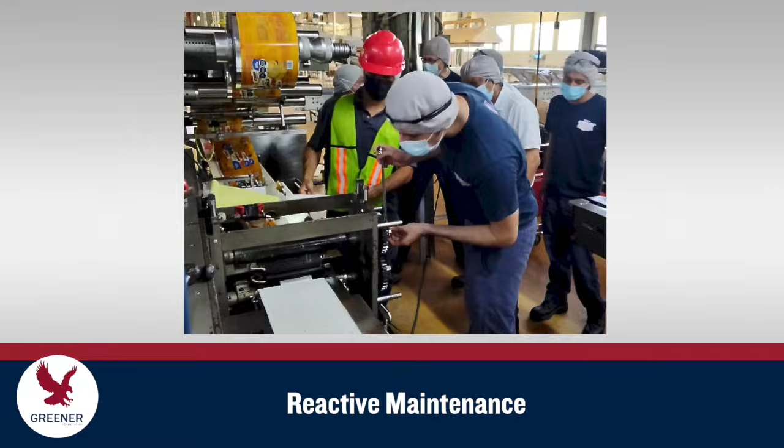Due to production demands and a shortage of experienced mechanics, maintenance on flow wrappers is often reduced to immediate problem solving. In the rush to restore production, this reactive maintenance relies on short-term fixes that don't fully resolve the underlying cause of the problem and fail to restore peak efficiency. Repeat problems require additional quick fixes and further erode efficiency.

This Greener Tech Bite describes a systematic preventative maintenance program for flow wrappers that sustains peak efficiency and production levels. If you and your team don't have the required time or experience to implement preventative maintenance, Greener's technical specialists can provide regularly scheduled on-site visits to perform line evaluations, make necessary updates, and provide training on these procedures.

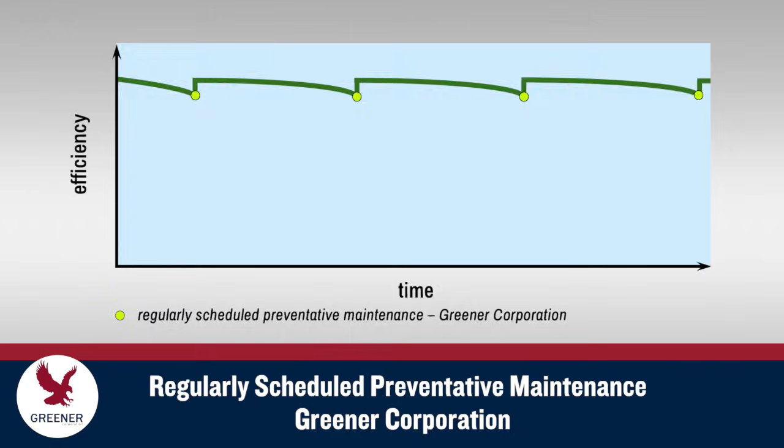The following flow wrapper components and adjustments, from the product feed through to the package discharge, should be evaluated and updated at least every 3 months.

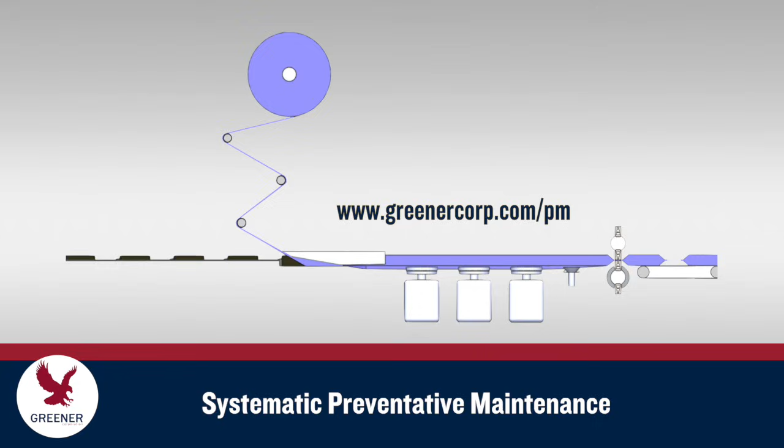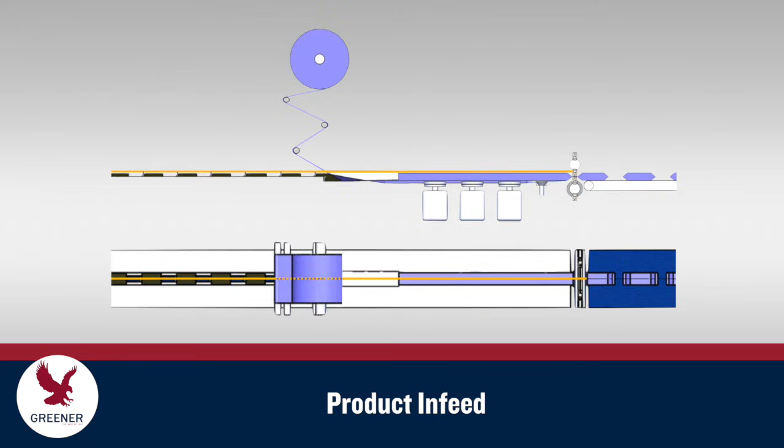On the product infeed, stretched or worn components cause product misalignment and create timing problems. Replace worn or stretched infeed flight chains. Inspect the belts, even those with automatic tensioners, and replace them if they are stretched, worn, or frayed and can't hold the proper tension.

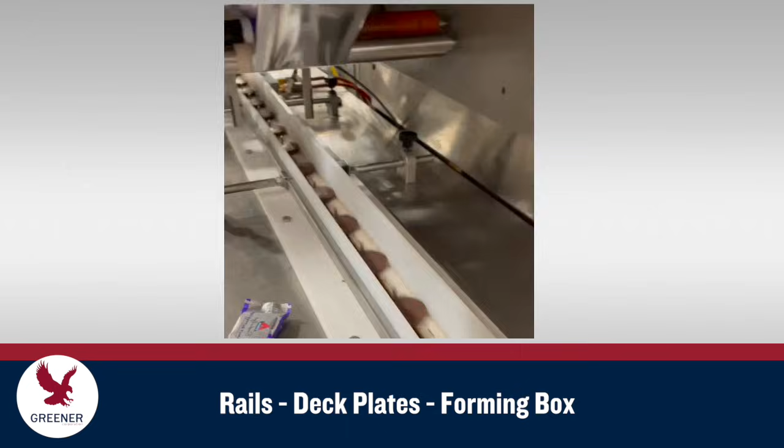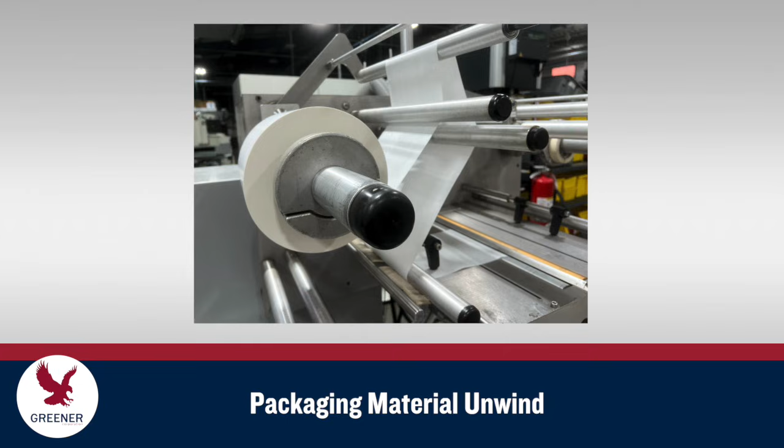The product infeed should be level and aligned with the flow wrapper. Check the rails, deck plates, and the forming box for misalignment or damage, and readjust, repair, or replace them as needed. When not level, smooth, or properly positioned, these components inhibit movement of the product and packaging material, causing malformed packages that delay production.

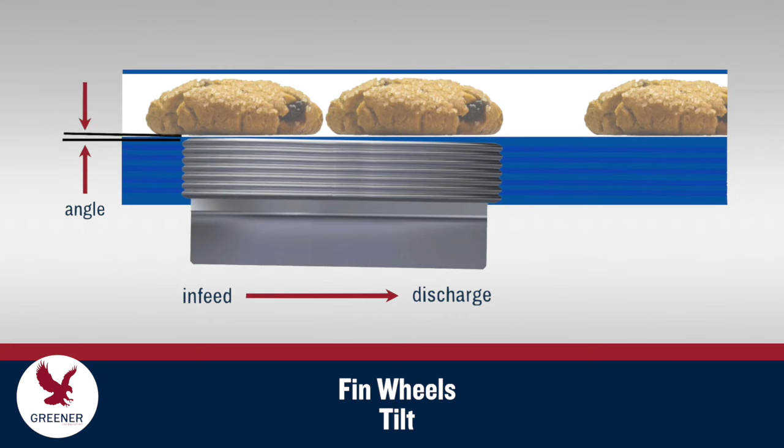Fin wheel issues can cause slippage, poor tracking, and seal problems. Make sure that the tension between the fin wheels is correct, and adjust their tilt to prevent slippage and create tighter packages. Replace fin wheels that are worn, damaged, or have sharp edges.

Check the condition of the fin wheel bearings and replace them if needed. The cutting and sealing head requires frequent inspection and updating.

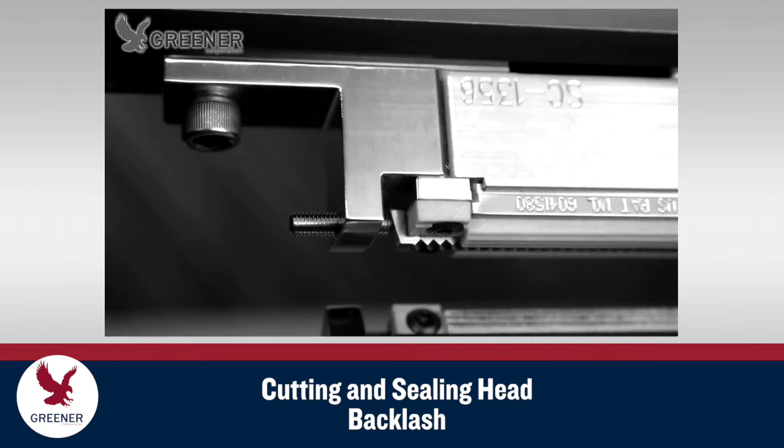Check for and remove backlash between the upper and lower sealing jaws. Inspect the gears and replace them if necessary. Assess the condition of the springs or compression washers and adjust or replace them as needed. Worn bearings cause chronic problems that can be difficult to diagnose.

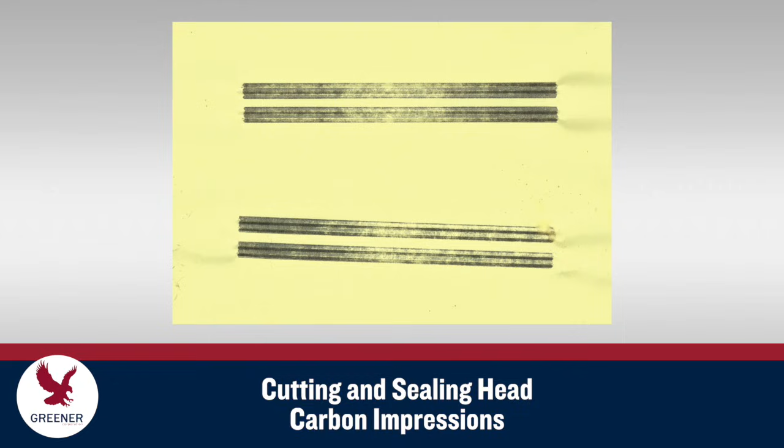Next, remove the knives and anvils, and with the sealing jaws at operating temperature, run carbon impressions to evaluate their condition and setup. Replace worn or damaged jaws.

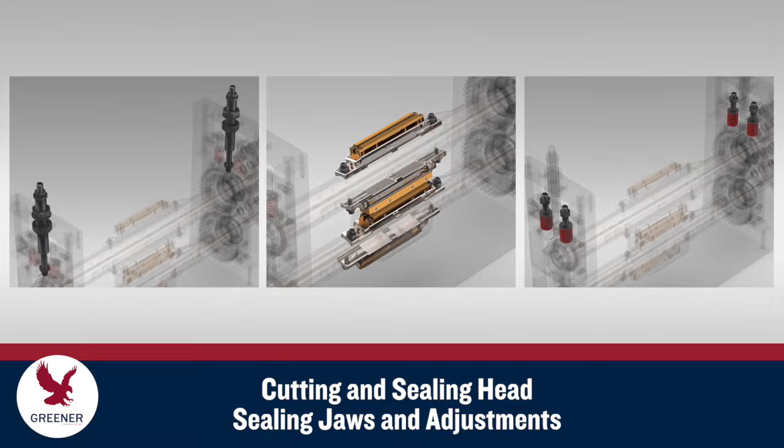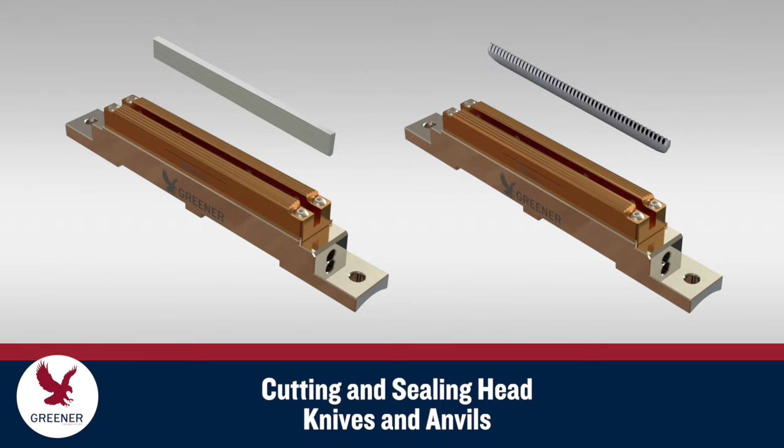Check and, if needed, readjust the clearance, phasing, serration alignment, and pressure. Clean the slots to ensure that knives and anvils can be firmly and accurately seated. To prevent cutting problems, always replace the anvil when installing a new knife. After adjusting the knife with shims or adjustment screws, recheck your sealing setup with another carbon impression.

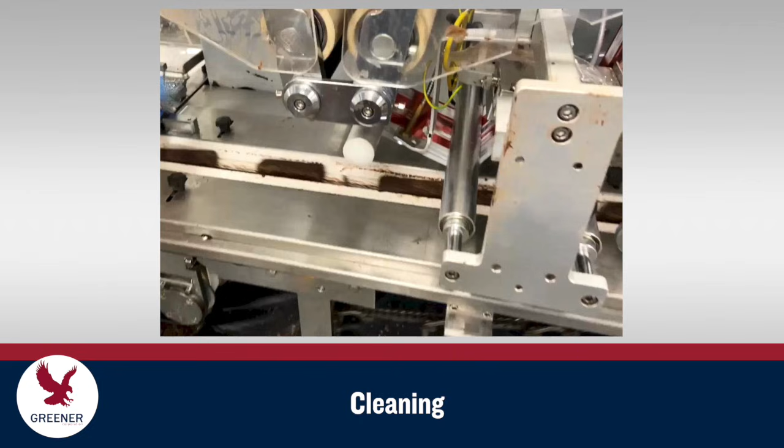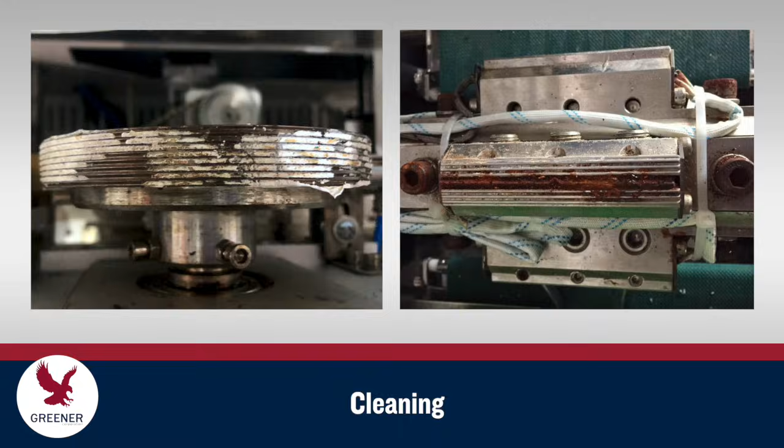At any point in the packaging process, insufficient cleaning can degrade efficiency. Clean components such as belts, formers, deck plates, fin wheels, and both the upper and lower sealing jaws during scheduled production breaks and whenever time allows, before problems occur.

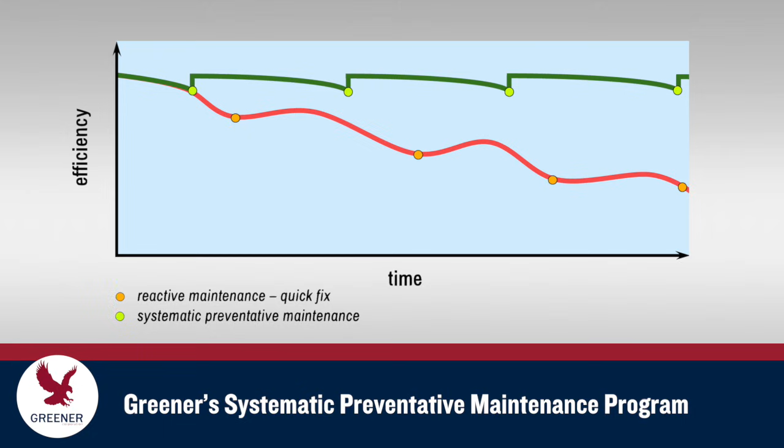Relying on reactive maintenance erodes package quality and output levels. If you don't have a systematic preventative maintenance program for your flow wrappers, consider partnering with Greener Corporation for regularly scheduled technical service visits. Our technical specialists will perform line evaluations, make necessary updates, and provide training to keep your flow wrappers running at peak efficiency.